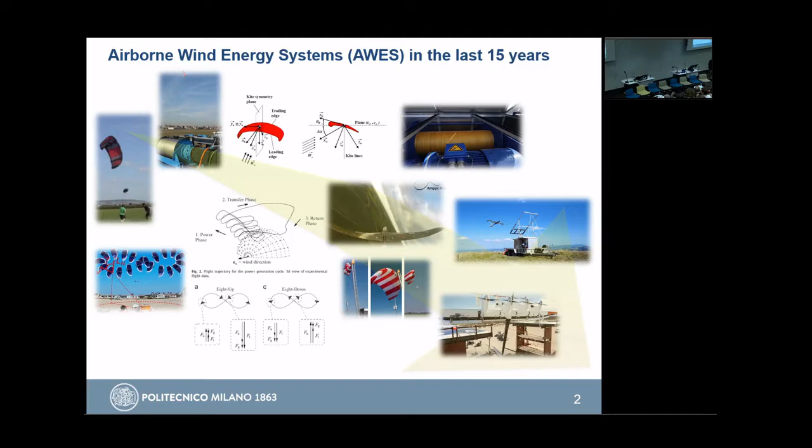Definitely what I can say is that this is extremely complex technology, and in my opinion, 15 years to reach the point where we are now, it's actually pretty fast, pretty quick development. And I will come back to that in a few minutes. What was the role of academia in all of this? So actually, it was a substantial contribution. I think all of us can argue that without academic research, we would not be here today.

So first of all, in academic groups, we built prototypes and did first studies. So the very first prototypes were built, with few exceptions, mainly in academia. And then this technology was transferred to startups. Here I mean not necessarily spin-offs, but also, or actually mainly, that's the most important part, transfer of people, of competencies. So these are examples of startups in which the people collaborated or worked in academia, other university or research centers before founding a company.

And then also equally importantly, the academic circles did dissemination, helped to foster the funding, and in general build the community. So examples are all the series of Airborne Wind Energy Conferences, two edited books, a lot of papers, and many funded projects with the joint presence of academia and companies.

And now the question is, okay, now we are in a phase where clearly the companies are much more ahead than anything that can be done in academic circles, in universities or research centers. So what can be the contribution now in this current phase? And I leave that for the end of the talk. So was this development in the last years good enough? Of course, we should define what is good.

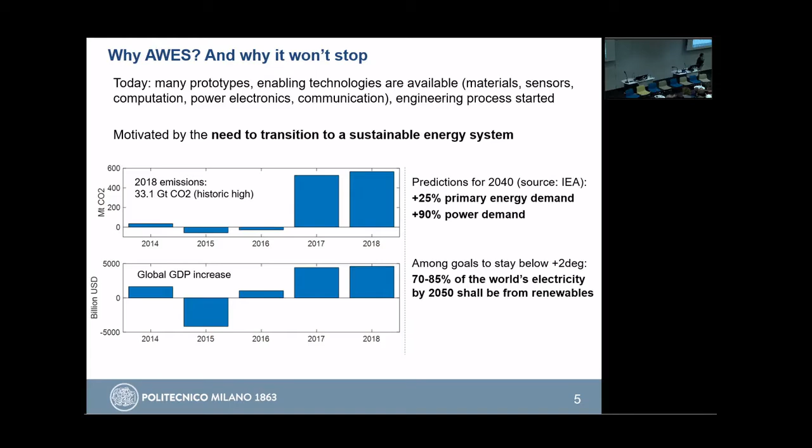And the situation is even more dramatic if we think about the future. There is a prediction by 2040 of plus 90% power demand. So that's twice the global electricity generated today in 20 years. And in order to meet the sustainable development scenario, so to keep an increase of temperature below 2 degrees, 85% of twice the electricity generated today should come from renewables.

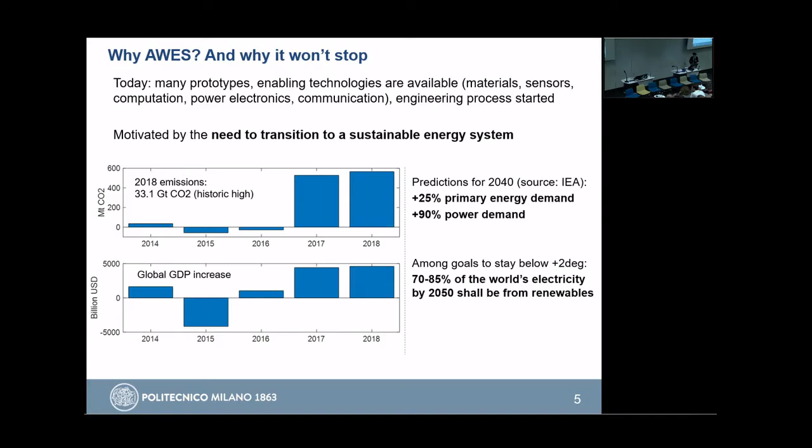So to me, it's pretty clear that right now wind and solar can be cheap, but they just might not be enough. Okay? And so I think the research and development in airborne wind won't stop until ultimately we either prove that it's convenient and doable, or we prove that it fails. Okay, so I said this is actually mainly a societal and political challenge. But for me, once societies decide to invest and spend money to deal with this problem, then all technical solutions should be there, including airborne wind. So this is why I think investment and support in airborne wind will continue.

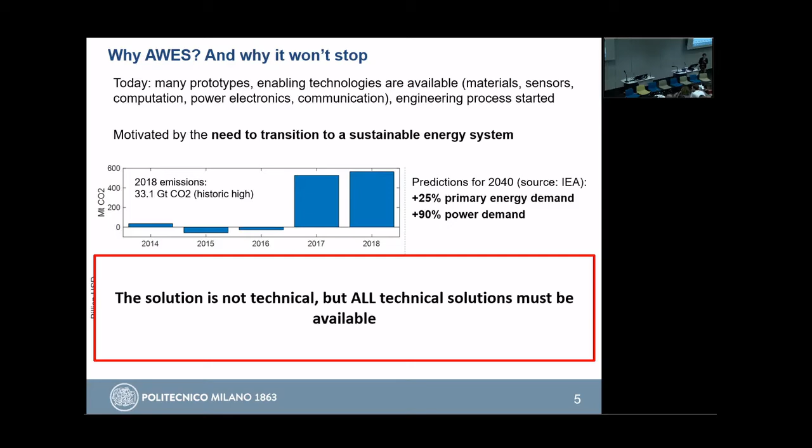So how can we bring airborne wind to be a good alternative? We have to grow in credibility. And how to grow in credibility? You have to remove barriers. So this also comes from this study, the EC study. This is essentially an overview of the different barriers, technical and non-technical, to the commercialization of airborne wind energy.

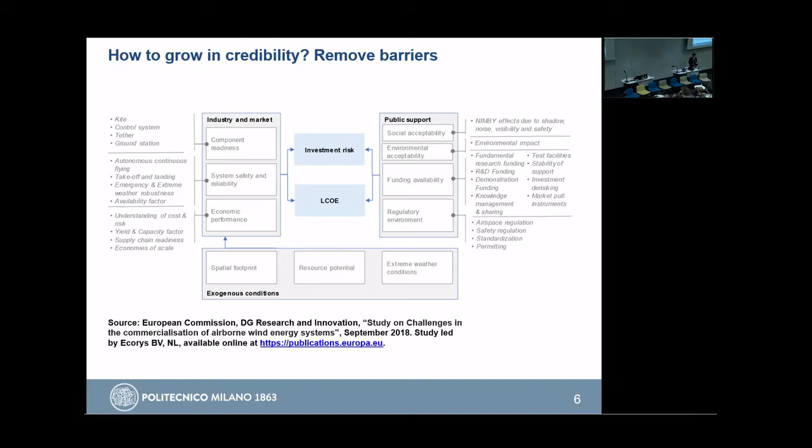So you have here a complete picture, and actually companies alone cannot deal with this complexity. There is really the need to collaborate among different stakeholders and between public and private. And all these 15 years of development, in my opinion, were mainly focused just here, on component readiness. So you see how much work still needs to be done.

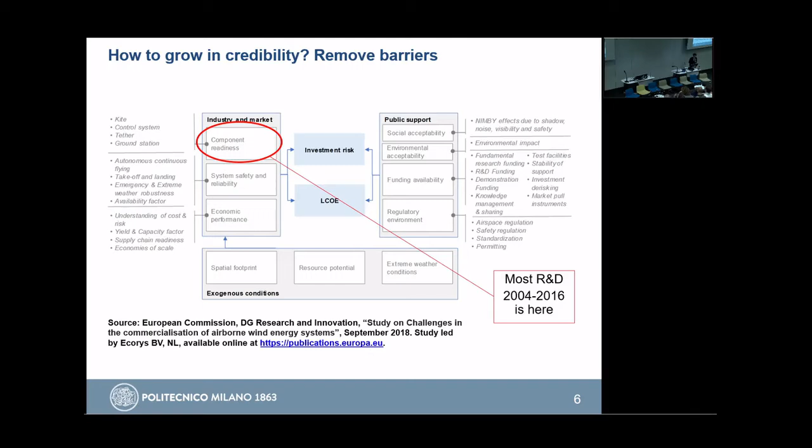All right, so finally, the same study gives some very clear recommendations, and I agree totally with this. Prove continuous operation, so really reliability, autonomous operation, that's the very first one that emerged from the study, and the study involves also interviewing stakeholders within and outside the sector. And then the other one is about resource assessment and complementarity. So is airborne wind a replacement for wind, or is it unlocking resources that conventional wind, for example, cannot reach?

Anchor the learning, so build community, take stock of all the lessons learned, create a hub, testing sites, and very important, invest in enabling technologies. And this is linked to what I will say now in the second part of the talk about automation challenges. So invest in enabling technologies. And the mutual trust, so this trust that needs to be in place between public and private bodies in order to push further the technology. So I will focus mainly on this first point, but of course they are all equally important.

So prove continuous operation. In our case, for airborne wind, this means safety, reliability, and ultimately automation. Actually, control engineering and automation engineering were born in order to have a safe, reliable operation of engineered systems so that the system behaves like it's expected to behave in our models. So the very use of automation is for that. And in airborne wind, this is special because automation is the real source of all the advantages of airborne wind, and at the same time of most of the critical parts.

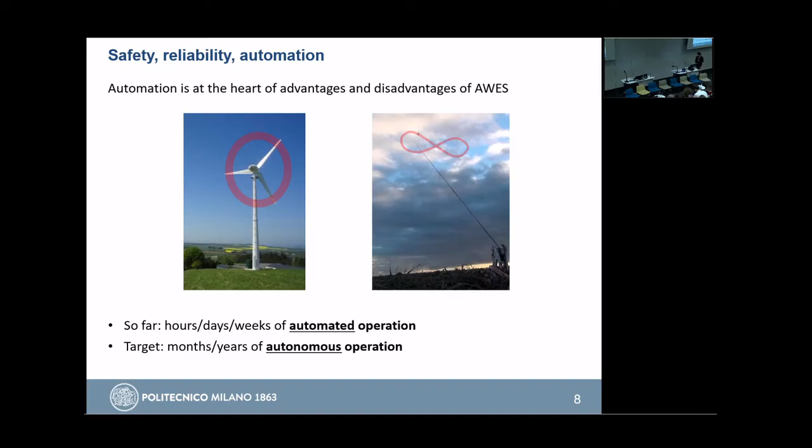Okay, but now let's look in the literature. What is a safe autonomous system? What are design guidelines? What are design principles? What are contributions in the literature about safe autonomous systems? So first of all, we have fail-safe systems and fault-tolerant systems. In a fail-safe system, essentially, the idea is that we design a system such that if there is a failure, the system can continue operating as it was doing before. And this implies usually high cost, proper engineering design, so FTA, FMEA, as we heard yesterday in the AWEC talk, and resilience to any single kind of failure. So triple redundancy of the sensors, dual or more actuators, so that if something fails, the system can still operate.

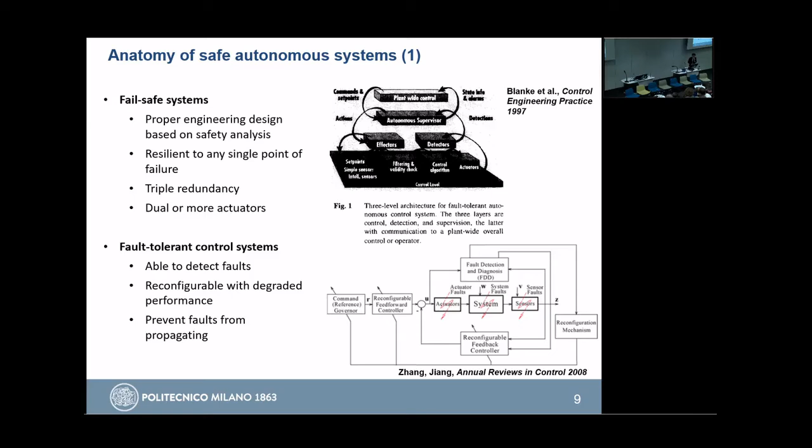A difference arises when the system is working in an uncertain environment, and it is expected that this system can take decisions in full autonomy. And there again, there is literature, but these are much less established approaches. It is more really in research. And here, what is included is further hierarchical levels, where there are layers that must provide faster reaction when something unexpected occurs, and at the same time allow the higher levels to take new decisions in autonomy. Okay, so to decide what to do in the face of something that was unexpected at the time of the design.

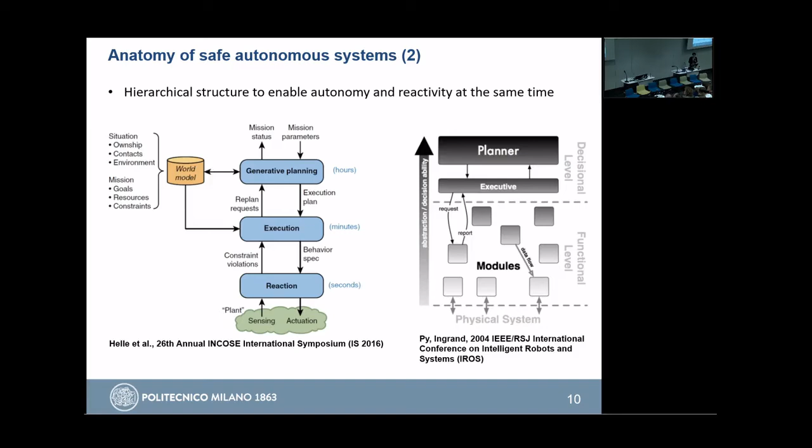Okay, now I think a sensible question is the following. In this effort to have fully autonomous operation, is it all a matter of engineering design, or is there something fundamentally difficult and new and challenging? I think to answer, we need to look closer at the specific aspects of airborne wind. So it's a system that has to work in a remote and confined area with a harsh environment, low maintenance, it has to be economic. It's open loop unstable, so it needs control to stay airborne and to fly. Decisions have to be taken in short time if a fault happens, so it's time critical, and unsupervised.

So up to now, I believe that if it were only for these aspects, these challenges can be tackled with conventional engineering design of safe autonomous systems. But there are two aspects which I believe are really critical and make a difference here. The first one is that we have different operating conditions and different.

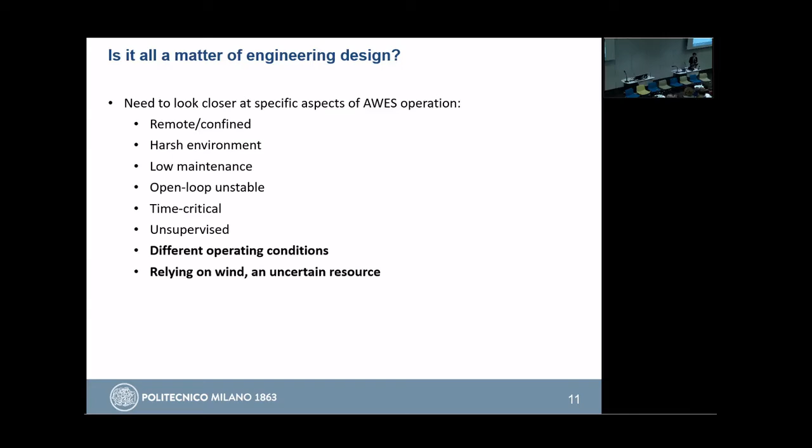Next slide I will specify more, but there are substantially different operating conditions. And the second aspect is that the system relies on wind not only to generate power but also to stay airborne, so to be able to fly. And wind, of course, is an uncertain thing. So let me be a bit more specific.

Operating condition, we have crosswind flight, that's where we have a lot of control authority. The system operates under the main, let's say, conditions envisioned in the design. And there the design is designed for fatigue. Okay? So it's much closer to design of conventional electrical and mechanical systems. So the crosswind flight is actually not much of a problem.

And then a very different phase is takeoff and landing. So here the relevant number is not really the number of hours spent there, but it's the number of takeoff and landing events, because each one of those events is with low, let's say, forward speed. There is much less control authority. The system is more, let's say, subject to uncertainties in the wind, in the waves, as we've seen yesterday. So each one of those events is a risk of a critical failure.

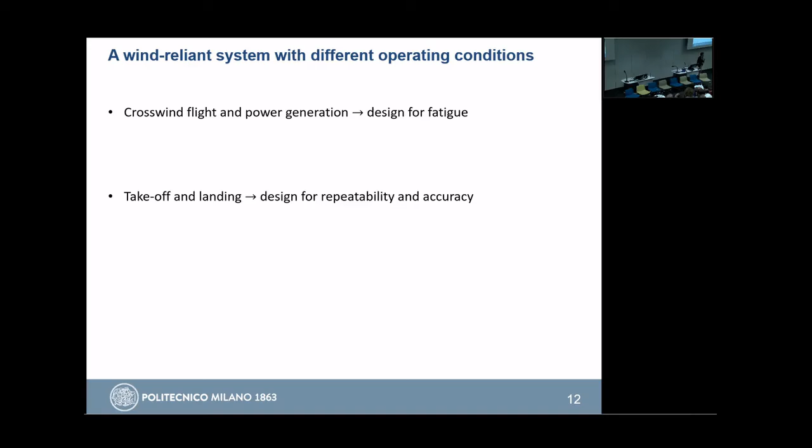Is this a minor part? Well, I was discussing yesterday with some people. So here it depends. Each one gave me a different number, but I was assuming, and I was thinking it's optimistic, that you have one takeoff and landing every 2 days. Okay? Now you take a wind farm of 300 units of airborne wind energy systems. That makes 54,000 takeoff and landing events every year in the wind farm. So each one of these is a risk of a critical failure.

And then someone says, okay, it's much less than that. Okay, let's say you have to take off and land every 10 days, once per system. It's still 11,000 takeoff and landing events every year. So this phase has to be absolutely proven against any fault, with extremely high probability you have to be able to do the takeoff and landing.

And finally, the wind reliance aspect. These systems will have to react to wind, which is not fully measured and is an uncertainty. And so the system has to make decisions in an uncertain environment. And the decision is, for example, whether to transition from crosswind to takeoff and landing or back, and how to adjust the operation in each one of those two phases.

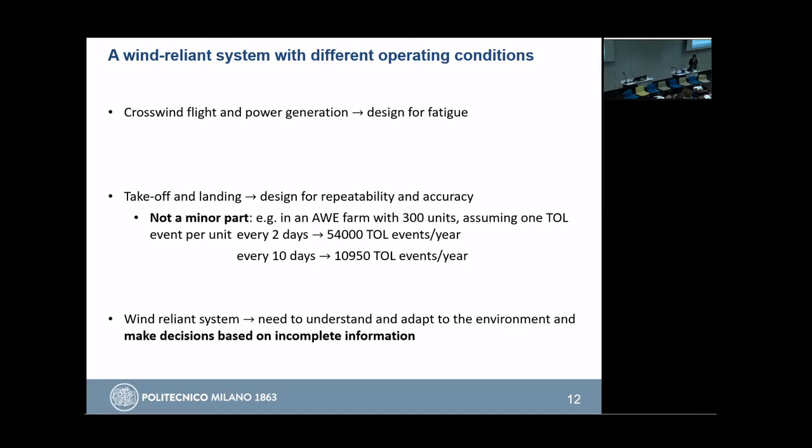And here I really think there is a fundamental challenge which is new and needs to be tackled. And the challenge is to ensure that this system makes safe decisions, okay, with time constraints, considering all the possible system and subsystem faults, and using partial information in this uncertain environment. So here the problem is that not only can we have a fault that disrupts the system, we also have the problem that if the system decides to transition in the wrong place at the wrong time, that also can be a critical situation and disruptive failure.

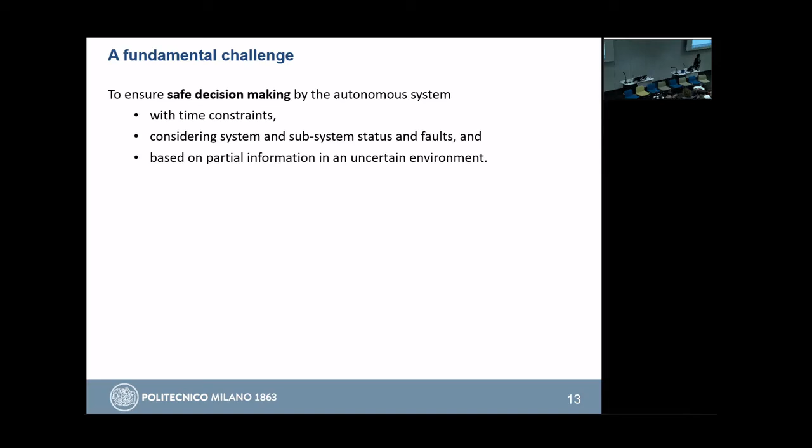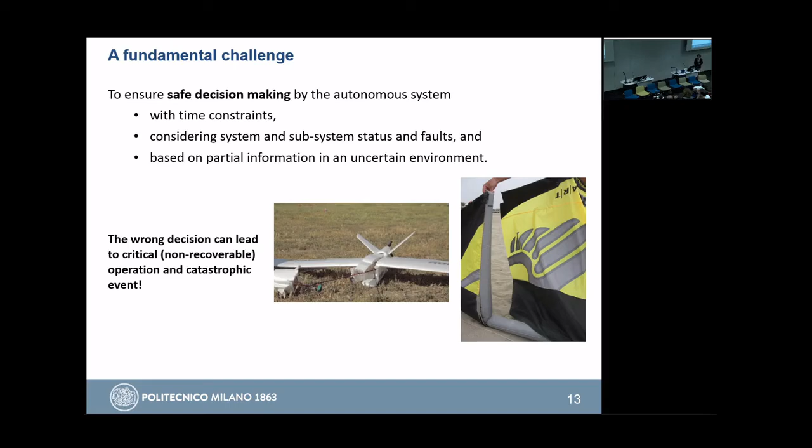So, yes, that's what I said. And actually, we should not just think about crashing on sea or land. Even exceeding the load too much can lead to a failure in this case. Okay, but now when you have a new fundamental challenge, the first thing you do typically is to look at other fields, whether there are conceptually similar challenges. And actually, nowadays there are many fields where people are looking how to solve similar challenges. Of course, with different specific features, but conceptually we are close to that.

One that comes to mind is autonomous driving. So you might be familiar with the levels of automated driving by the Society of Automotive Engineers. Level 5 full automation is where some years ago many companies were saying, okay, in 5 years we will have these autonomous cars. Now it's more maybe 15 or 20 years from now, because there is really a fundamental challenge in how this autonomous system can handle uncertainty. And the other one is robotic systems to do all sorts of, let's say, futuristic tasks, including exploring new planets.

So, of course, it's very different. There are advantages and disadvantages with respect to airborne wind. These systems don't need anything uncertain to remain safe. They can just stop. Well, in our case, this is not the case. But on the other hand, of course, the complexity there is orders of magnitude greater than the complexity you have in an offshore wind field. But again, conceptually, the challenges are somehow similar. And in these areas, actually, there are billions of funding for something that maybe will never be there.

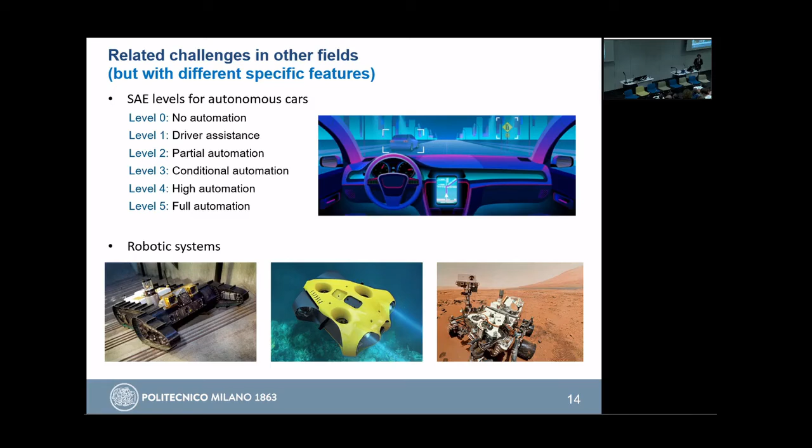Okay, what are solution approaches to this challenge? Of course, it's a new challenge, so I don't have a definite solution. Otherwise, I would have talked only about that in this plenary. So there is no established solution. And we can think about approaches, data-driven approaches, so-called machine learning.

There's a lot of hype around it in these years. Of course, there are advantages and disadvantages. These are good methods at hard tasks, but in the literature, these are typically static tasks, image, speech recognition, these kind of things, not tasks with time constraints and fast dynamics. And also here you need a lot of data, and there will be problems regarding how you certify your system, how you can interpret how the system works, how you can predict how the system will behave, and how can this be scaled or adapted.

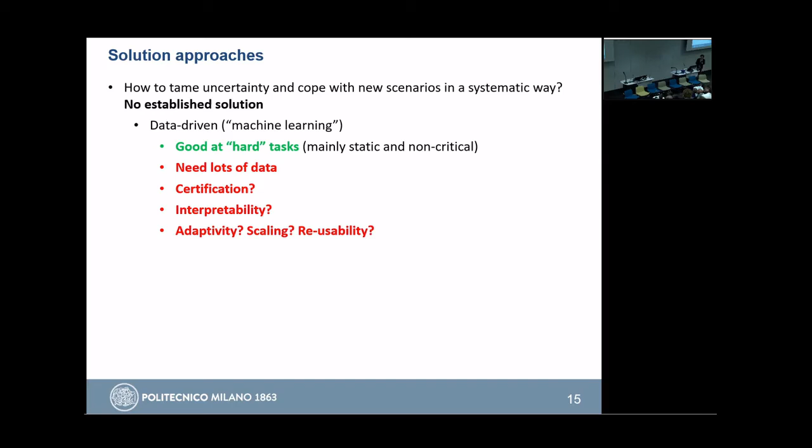So actually, I'm not seeing this in this community, which I believe is a good sign. It's much more about model-based approaches, but also here there are problems because it's difficult to model the highly complex scenarios and to take into account a priori all possible occurrences of situations that can be a problem. So how to derive reaction logics in this plethora of possible dangerous situations, that's a challenge. And there might be something else, maybe something in between, maybe something completely new.

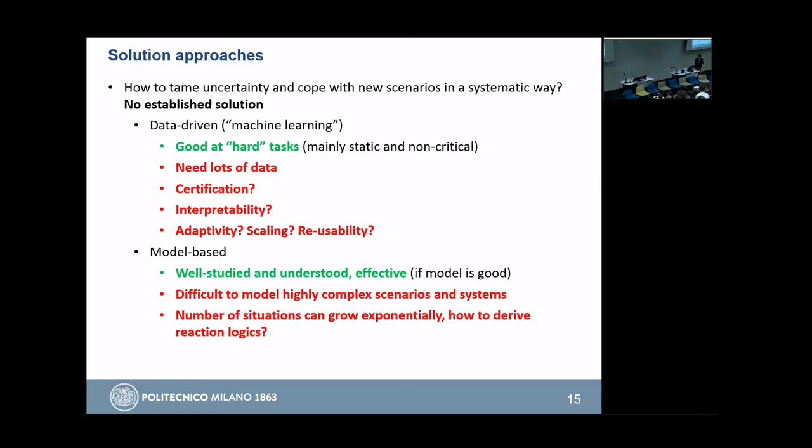And so here I come now close to the conclusions. These challenges can also maybe become opportunities. So if you think again of the autonomous vehicles case, there we have two factors. We have a societal challenge, that is the number of deaths due to car accidents, mainly because of human faults, and the business opportunity that car makers and other players are seeing, shifting from driver to passengers and the so-called passenger economy. So these two together are motivating huge research and billions of investment in autonomous vehicle technology.

The case for Airborne Wind: well, clear societal challenge, need for energy security and mitigation of climate change. At the same time, business opportunity, plus 90% electricity generation in the next 20 years, 85% of that must come from renewables. So these two together should make a good case for Airborne Wind. And actually, in both cases, we see that these automation and robotics aspects are really, let's say, right now, the bottleneck and the main challenge. So maybe there is opportunity to reach out or somehow to link to research and development and the companies working on automation and autonomous systems.

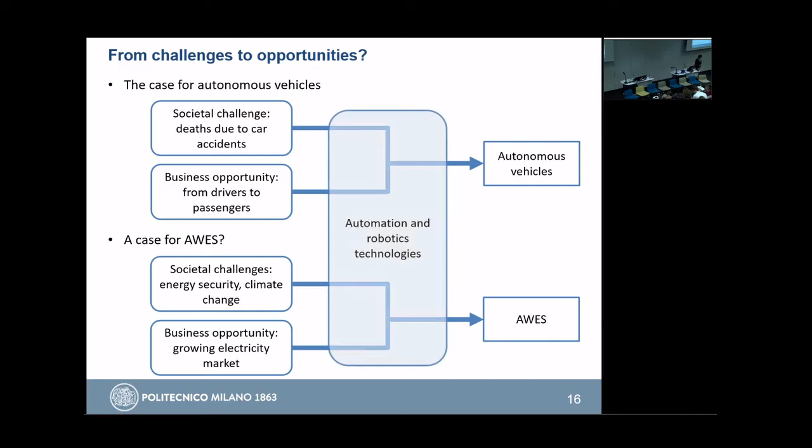So this brings me to the conclusion. I was saying before, and it was suggested also by this ECORYS study, that public-private collaboration is crucial for many things, regulations, funding schemes, and incentives. But of course, also academia, universities, and research centers are part of the public sphere. And I think really a crucial part of this public-private collaboration is the interaction between the companies and academia. As I said at the beginning, universities cannot compete. It doesn't make sense for a research group in academia now to develop from scratch a new prototype.

But what makes sense is, for example, to provide expertise on specific aspects where research groups are really expert, so really focused expertise on specific problems to the company. Work in R&D on non-standard problems. So, for example, this fundamental challenge in automation is really very important also for academic research, and solutions could then be transferred to the company. And then keep doing the good job in consolidating the results, disseminating the results, building the community, training the people, because when the companies get money, then they need to hire, and having people that are trained for the challenges in Airborne Wind is also crucial, and continue to facilitate fundraising and research and development.